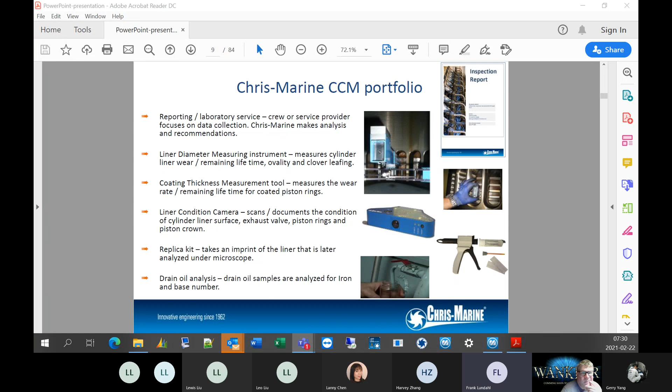We try to do this on a monthly basis, just to have a very good view of how the engine is feeling, so to speak. So the first year, we recommend you do it once a month or even tighter, just to make sure the lubrication and everything is as it should be. After that year, maybe once every 3 or 4 months, depending on how the results from previous measurements have been.

The consequence if you have problems you don't know about is that you'll have to change liners, hone them in place. Worst case scenario, I have to fly liners all over the world. In this case, I was on this job with David, it was a brand new engine, only 400 hours old, and we had to hone 2 of the liners. I think one of them was so bad that it was almost worn out already after 400 hours. So that's why it's so important to have a good view of your liner condition.

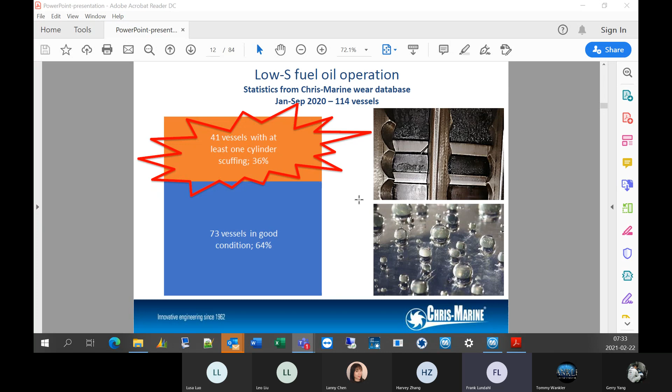We have seen that when we hone a liner, we get a very rough surface. This is basically just to have a good starting surface for the piston ring's life. After that, if the liner is wearing normally, you will have these very nice open graphite pockets, which basically is an oil reservoir for the liner. So the oil actually can stick to the liner.

If those pockets get clogged or something else happens, you will get scuffing, and that is basically micro welding between the piston rings and the liner wall, which of course is a bad thing.

This is a typical picture of scuffing. All the graphite pockets are smeared together or in some other way clogged up. We have no oil reservoir, the micro welding takes place, and you will get cracks in that surface. When those cracks start to open up, you will get a very high rate of wear in the liner, which basically in the end means that you have to change the liner at a very high cost.

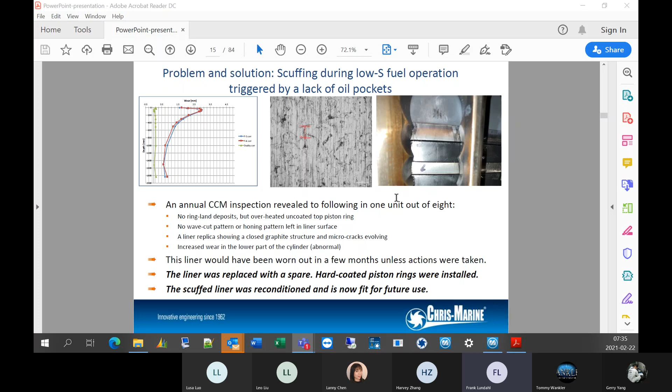If you do not take action when you see that you have bore polish, your liner could wear out in less than one year. Basically, that is what we saw in the picture where we did the honing. If we do this CCM, we can detect problems early on and take actions, and the liner can outlast the vessel.

We have some different problems. If you have a high sulfur fuel operation, you can get something called cold corrosion, which is a bad thing. You get an abnormal high wear in the liner, which basically destroys the liner.

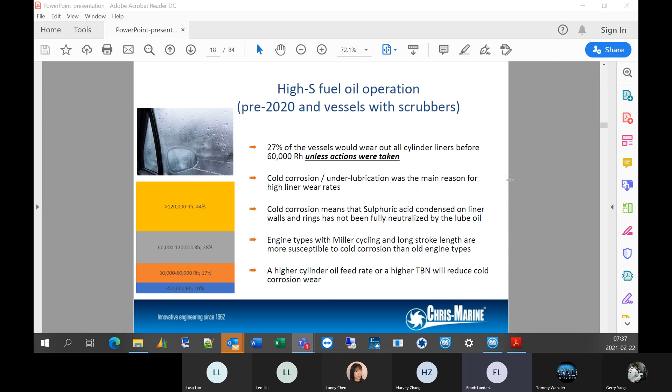The same thing applies if you have a low sulfur fuel, you can get the scuffing problem. So basically, it's a very narrow road you have to walk if you're going to have the liners last for a very, very long time. If you lubricate too much, they will wear out, and if you lubricate too little, they will wear out as well. So it's a very narrow path.

We use CCM to check for cold corrosion, and we use CCM to check for everything else. We have this graph here where we can actually predict when the liners are going to wear out. If we don't do anything from the beginning, we just carry on, and we can figure out that following this graph, the liner is going to wear out after 10,000 hours. But if we see the problems with the CCM program, we can take actions, more lubricating oil or less lubricating oil, and then we can change this curve so we can actually outlast the vessel.

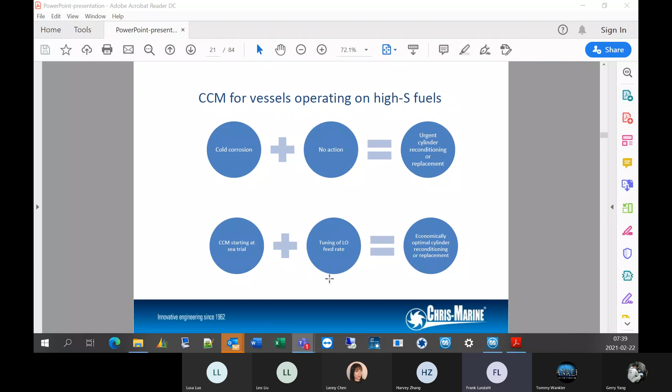How liners wear is a little bit difficult to say exactly, but one common denominator they have is that they always wear mostly at the top. So naturally, you will get a kind of trumpet shape of the liner. On top of that, you will also get, or could get, a clover leafing shape. That means the piston rings do not seal properly against the liner wall, and you will get blow-by and lose power, and worst case scenario, you destroy the piston rings and they collapse and you will get a scavenge compartment fire.

The only way to measure these clover patterns is with the LDM, because if you measure this with a stick, you will not get exactly how the liner looks. It's very difficult to detect if you don't have an LDM.

When do we do this cylinder reconditioning? That is what we call honing. That is where you have a lack of oil pockets, and that is basically the scuffing scenario.

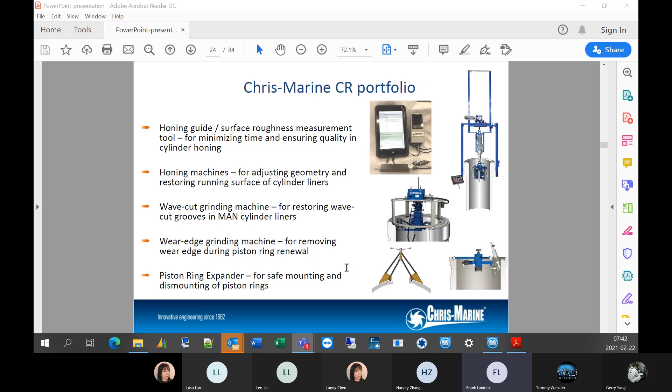This is the portfolio we have for fixing a liner. We have a honing machine, a grinding machine, and a little bit of that. But you already know this information, of course.

Summary, CCM and CR now. Several engines switched to low sulfur fuel back in 2020, and they haven't kept up the changes of the lubricating oil. So many boats have problems today without even knowing it, and that is something that could affect the boat later, because if everybody discovers they have a problem at the same time, you get a liner shortage, and worst case scenario, the boat has to go off hire.

Urgent maintenance is much more costly than planned maintenance, because if you plan it, you can stop the boat when you want and do the maintenance there, instead of emergency maintenance in a port where you have to fly the liners in or fly the tools in.

I don't know where we are in the... Okay, we can start with the drain oil sampling analysis.

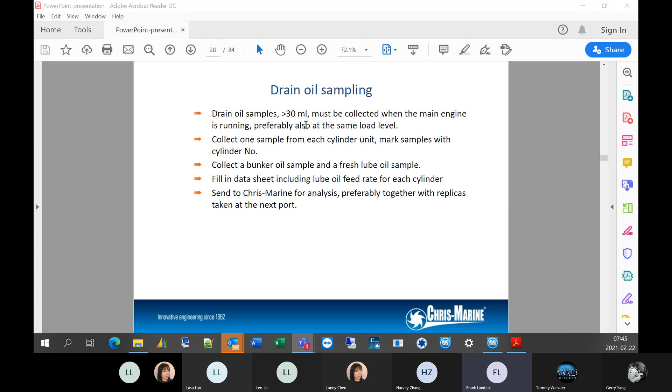It's slightly misleading, because if you have a very high ferritic wear and you increase the lubricating oil, it will seem like you have lower wear, because the ferrite will show less. But in real life, you have just diluted it a little bit, so you have more oil with less iron in it, but the wear could be exactly the same.

This is basically the same as before. We have the replica analysis. I think this is by far the most visual thing we have to look at the liner wall, because you see very, very high detail in the surface.

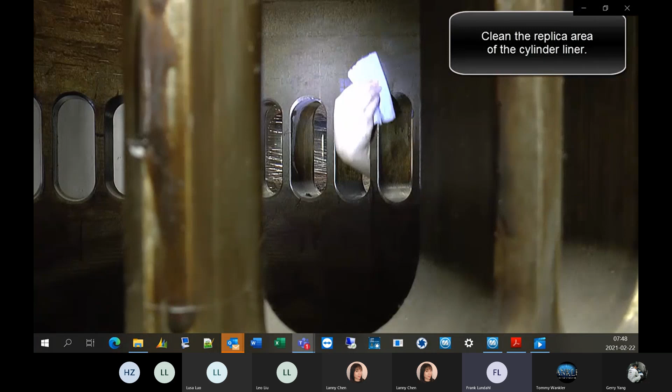Then we just let it roll. This is basically how you're supposed to take a sample from the replica. Clean everything up, make sure the extruder gun works as it should, and extract the compound onto the backing plate.

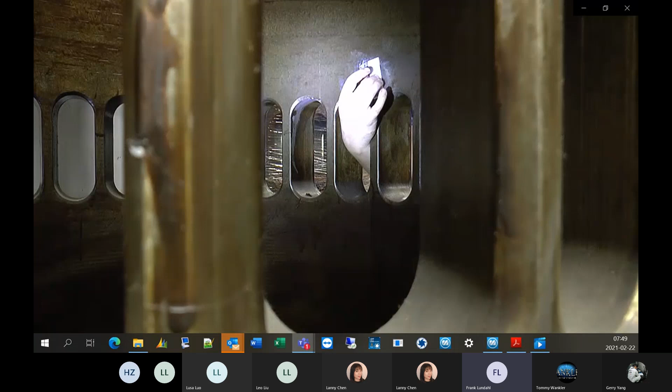And apply it to the wall, and you keep it there for 1 to 2 minutes. This is true for the F1 compound. If you have another compound, the time may vary.

You protect the sample with a piece of paper or something, and you mark it clearly so you know what liner you took it with. Put it in a bag, and you're done.

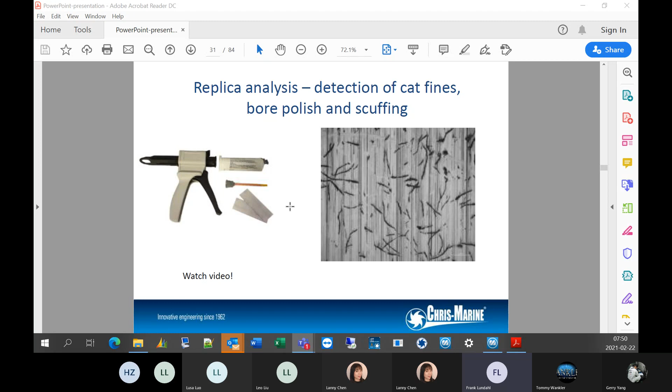At this point, you will send the sample to us, and this is what we can find out from the sample analysis. We can find cat fines, that is very small, extremely hard particles, that is from the fuel oil. The cat fines is added to the fuel oil when you refine it to get more oil out of the crude oil. I think it's called separators or purifiers. The purifiers on board a boat are designed to remove cat fines from the fuel. Depending on the state of the purifiers, they are more or less successful of doing that.

If you have a poor filtering system and very bad purifiers, the cat fines will enter the liner through the fuel oil and embed themselves in the cylinder wall. And those are extremely hard, so they will wear down the piston rings extremely fast. You can destroy a set of piston rings in 24 hours if you are very unlucky.

We can see scuffing, and that is a result of an early bore polish, micro weldings between the piston rings and the liner wall. We can see if everything looks as it should, if it's normal, or if we have a bore polish situation. And this shows very clearly under a microscope.

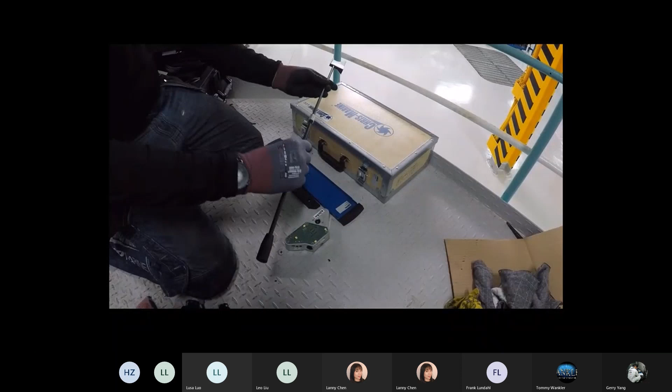First thing you do is adjust the plate so it fits the liner, and I urge you to read the manual. We have had some incidents where the camera plate actually got stuck inside the liner. So if you're gonna measure a 500 millimeter liner, you do the plate at 490, that is 10 millimeters smaller than the nominal diameter.

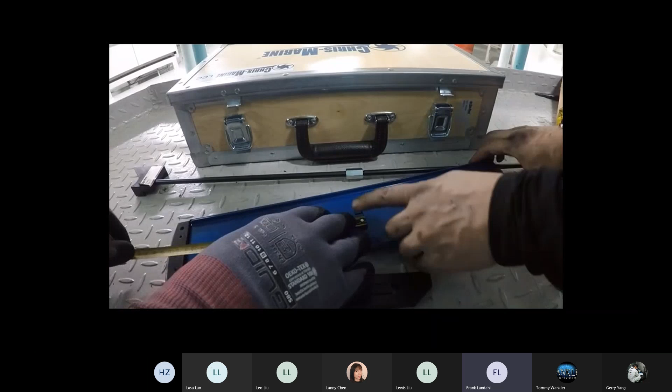Because if you get everything up to the parts where the combustion happens, just above the piston rings, you can have carbon deposits and everything, and this plate can get stuck. So it's very important that you make it 10 millimeters smaller than the nominal diameter.

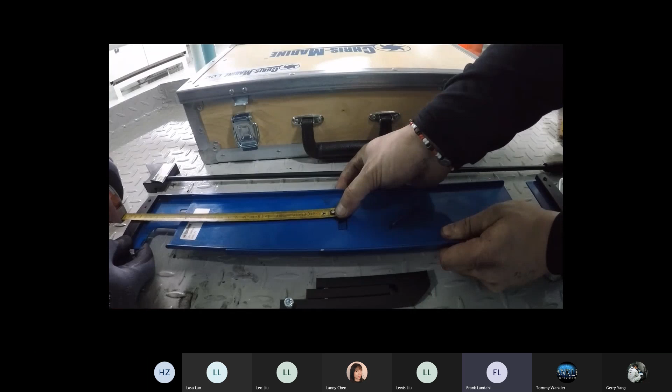And you adjust one side at a time, so you get like a radius from the beginning. If you look closely there, it's a 600 liner, and the plate is 590 millimeters.

Insert the plate. First thing you do is put in a height gauge. This is just because you don't want to squish the camera, and it's basically just a tell if you have enough space in the top. I have never seen that one being bent over by the exhaust valves, but I'm sure it will happen sometime.

This means if this one is not bent over, the clearance is sufficient. If it's bent over, you cannot turn the engine all the way around.

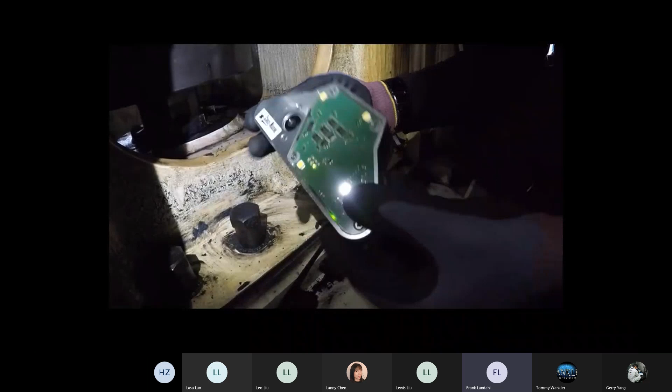This is preparation for inserting the camera. You polish the lenses if you have oil or so on them. Reach the height. I think the nominal time for this one is 60 seconds before the camera starts to take pictures, so you have a minute to insert the camera.

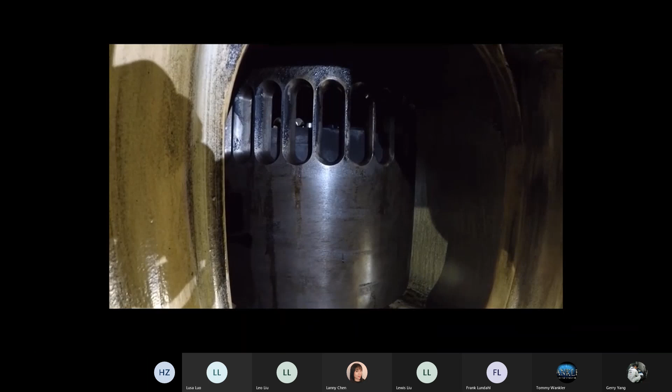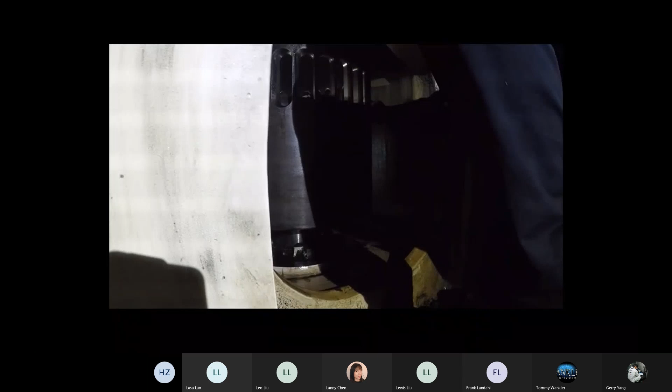And you get 3 quick flashes, and then a very bright one, and the turning of the engine can start. In this case, you do 4 revolutions, and you will get pictures from the entire liner. You remove the camera and you remove the plate. That's it.

What we can see from the pictures, those are taken with another camera outside, is the piston ring area. We are trying to get good photos with a tablet at the moment with the right lighting and something to hold it. But I think these ones are taken with a normal cell phone. We use everything we can just to get the best possible pictures.

But these ones are taken inside the liner with the camera, and you can actually see if you have black lacquering. And if you do something about this scenario and do the CCM again, you can see if you have solved the problem or not. That's why it's kind of important to do this on a regular basis.

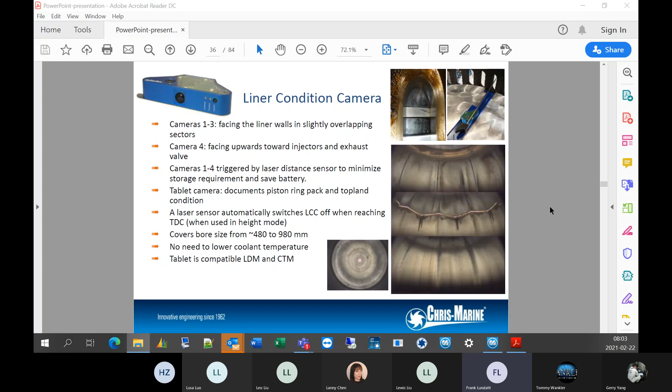It says here no need to lower coolant temperature, but the camera can actually overheat, and the hotter the camera gets, the poorer quality of the picture. So you don't want the liner to be over 70 degrees. Since you're doing this with the LDM, and the LDM demands a lower than 70 degree temperature in the liner, it's natural that you will get below 70, even if you only have the camera.

Let's say the current version... I don't know how old this text is, but the current version of the LCC, I think you can download everything at the same time, but the way we on the TSA team use it, we take all the pictures, leave them in the camera, and download it when we get home. We are currently trying to improve the software a little bit so it will be more user-friendly, but it has not been released yet.

The camera has to be charged for at least 3 hours. If you have a lot of liners, it could be that you need to recharge the camera in between the liners. You'll have 3 LEDs on top of the camera that shows you how much battery you have left.

And these are the parts: a tablet, a camera, a plate, and the distance template, a couple of cables, and an insert and takeout tool.

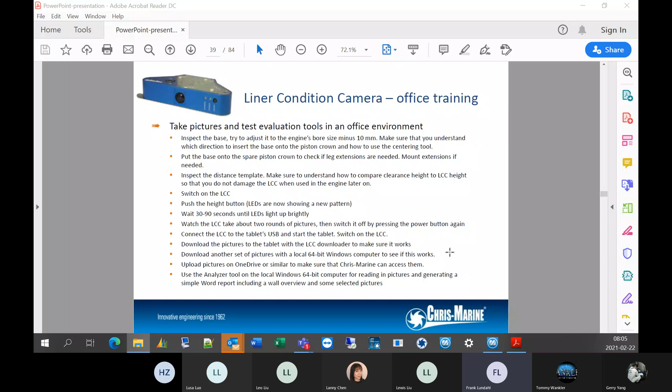Next tool we are using is a CTM, which is a coating thickness measuring device. I measure the coatings on the piston rings. I will put up another video of this.

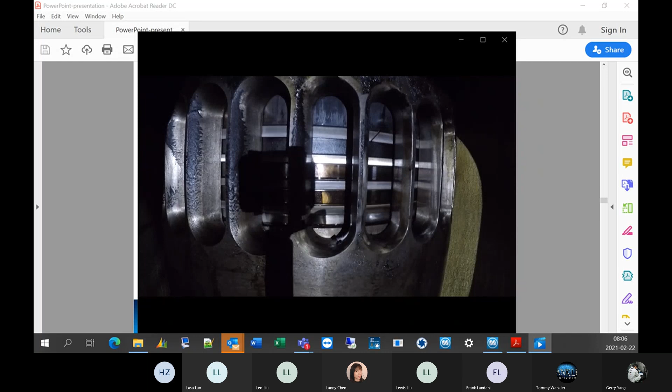This shows you where you want to have the piston. You put the piston in the correct position. Let's see here if I can get the next one.

You need to get the piston rings kind of clean, because if you have contaminations on it, the measurement will be slightly off.

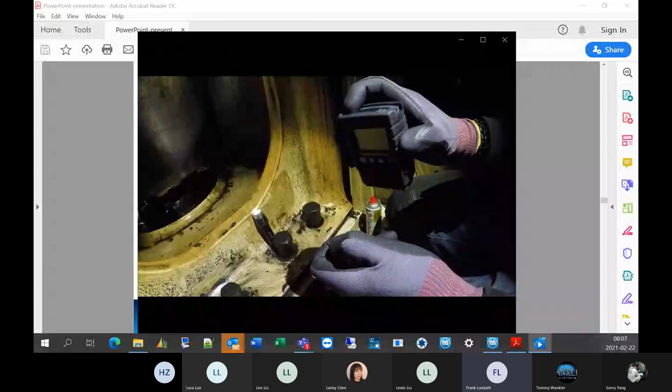You take off the protective cap. You turn it on. You will see a stripe line. And you just push it against the piston rings, and you will get a reading from that, and that is in microns.

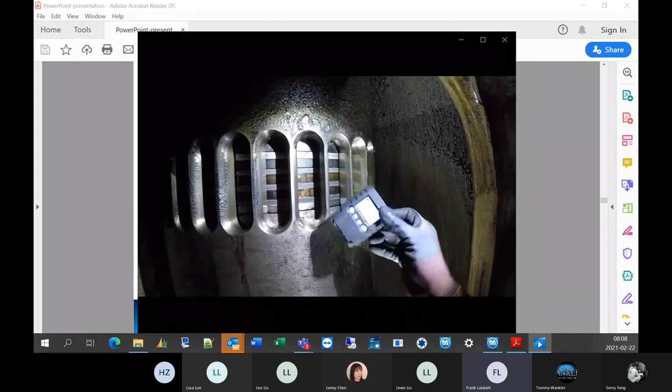You measure a couple of times on each piston ring, and you take an average. In this case, you have 7.2 microns of coating, which is not very much.

I think the coating is supposed to be somewhere between 400 and 600 from the beginning, but you have a little bit of variation because the process of making the coating cannot be controlled very accurately. So you have a small deviation, and it's important that you measure a couple of places and many times.

Different brands have different kinds and different numbers of piston rings. Like MAN normally has 4 piston rings, and Wärtsilä and BW has 3. So it's very important that you know which engine you're measuring, so you get all the rings.

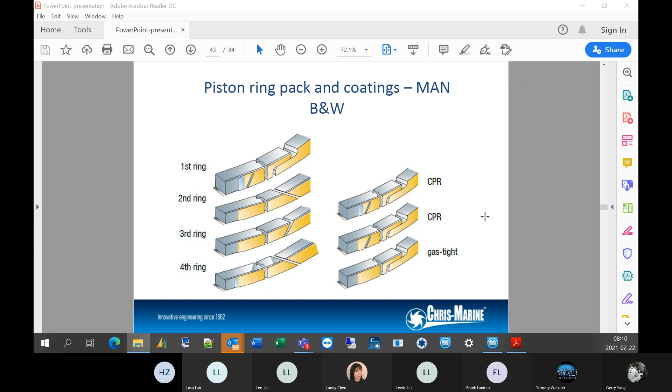There's a couple of types of piston rings. You have a gas lock for some of them, and some of them are just cut, and some have these grooves in it, and some don't, depending on where they are on the ring pack.

So we have the numbers for it. Normally the top ring has a coating of cermet. The coating is supposed to be, I said 400, here it says 550 to 600 microns. And a soft aluminium coating on that one for about 250 to 300 microns. So this is the number you expect to see if the liner is okay, or if the piston ring is new.

This cermet coating can last between 10 and 40,000 running hours. And the aluminium coating wears off within 500 to 3,000 hours, so that is basically just a running-in coating. All the bad things that happen in the liner, like bore polish, cat fines, or corrosive wear, will accelerate the coating wear rate, of course.

We have a scenario where if you have a hard chrome coated piston ring, it's also true that the coating thickness varies around the circumference due to the manufacturing process. So you will get a slight variation of everything, but it should stay around 400 to 600 microns.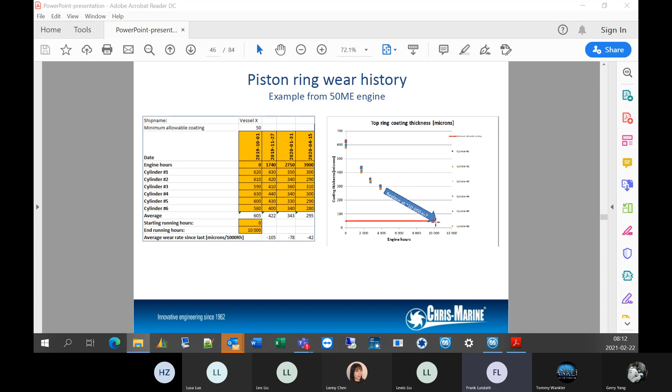What do we have more here? We have the LDM tool, which measures the diameter very accurately.

And like this, we can predict that the coating will wear out in 10,000 hours, for example. Here we can also see the trend surface if you have a very high wear trend. If you take this trend from the beginning and do nothing, you will have a maximum wear around here, and that is about 4,000 hours. But if you tinker with the lubricating oil or do something else, you can actually prolong the wear of the liner, so it doesn't wear out as fast.

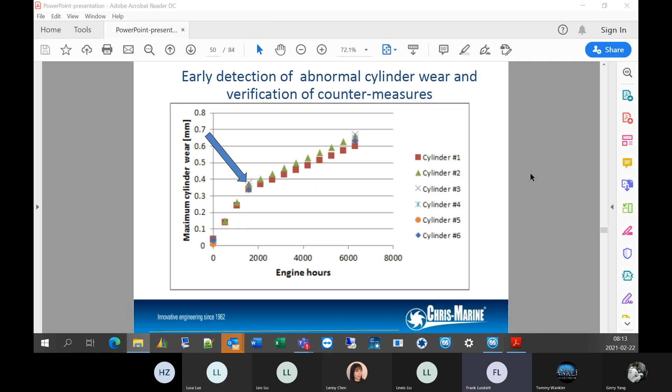The ovality could be triangular depending on how many injectors you have, or if you run on high sulfur fuel oil and everything. It's not really clear exactly how the ovality will appear, but normally if you have 3 injectors, you will get a triangular oval shape. If you have some funny business with lubricating oil, you can actually get almost like a star shape. That is a mirror of how many lube oil injectors you have on the liner.

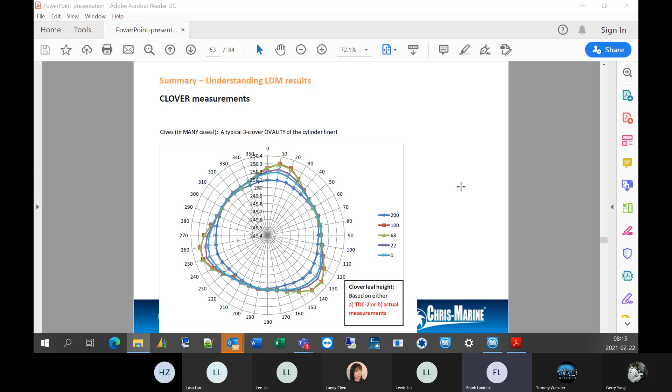This is an onboard version of the LDM. It's pre-calibrated from here, and they use it on only one engine, so they don't need all the tools around it.

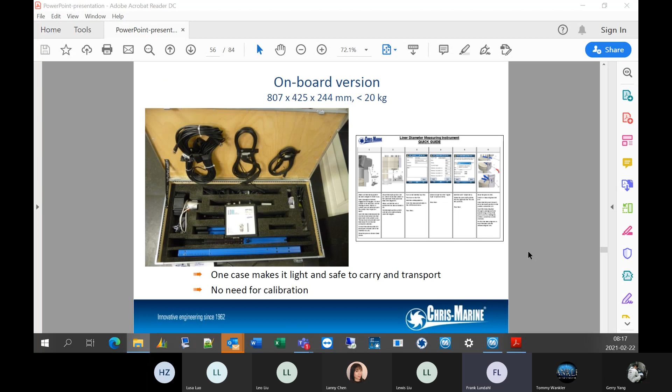And this is the tools you get: a height meter, the LDM, a tablet, an interface box, an inside micrometer, and a calibrator rig. It's not standard for everyone, but maybe I'm wrong here - they might get a calibrating rig for the onboard version as well. I'm not 100% sure of that, but also a bit of cables, insert and takeout tools, and a screwdriver.

The workshop version, you get all the extra legs and quite a bit more of things with it. I'm guessing you have the workshop version at your place, and it weighs about almost 30 kilos.

Some engines, we have figured out, need to get ground in the scavenge port because of the manufacturing process. So you will get kind of a teeth shape in the holes, and the LDM will not fit basically. You will have to have 35 millimeters, it should be here somewhere - well, I will figure it out for you. But we have a paper from MAN that says it's acceptable to grind those teeth down just to get the LDM in and out.

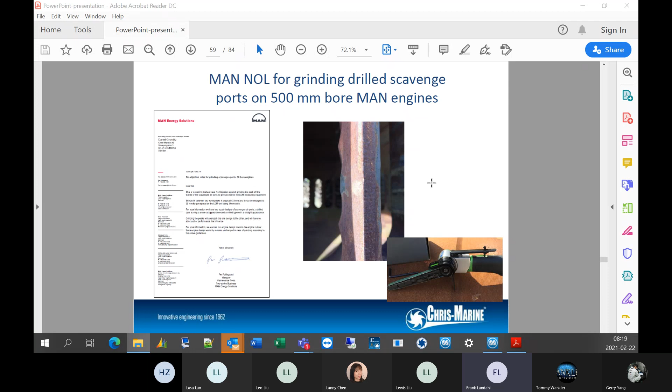But when you get out and measure an engine, you will need to check that the customer has made the right measurement, because at least half of the time the customer has made a mistake. So if you just buy their numbers straight off without double checking them, you might be destroying your instrument. So please double check that before you measure.

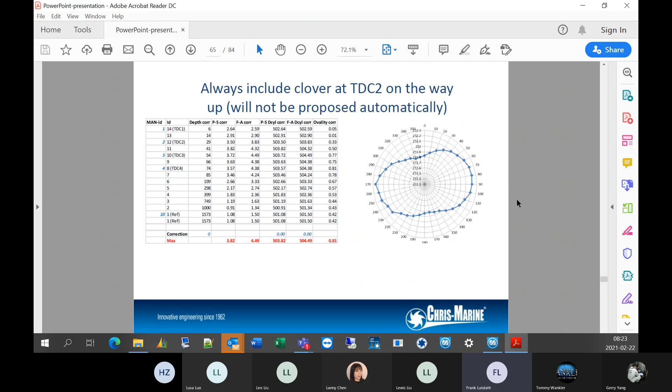What we do at TDC2, where the second piston ring turns at the top, is take this clover measurement. We always do that at TDC2, and you can do it on the way up while measuring, or complete the entire measuring sequence and then do the clover afterwards. It's up to you, as long as you remember it. This will take about 5 minutes.

All of these numbers you will extract either on the tablet or in your computer, using a post-processing tool that is fully automatic. You will include all your liners, and the Excel document will extract all the data, so you will get this picture automatically.

Do you have an LDM at your place so you can do some practical training?

Is anyone with me in China? Hello? Hello, hi, hello Patrick, okay. Yes, we have an LDM in the office now. Oh okay, yeah, that is good. So do you want us to operate it? Let's see, how much do I have left here?

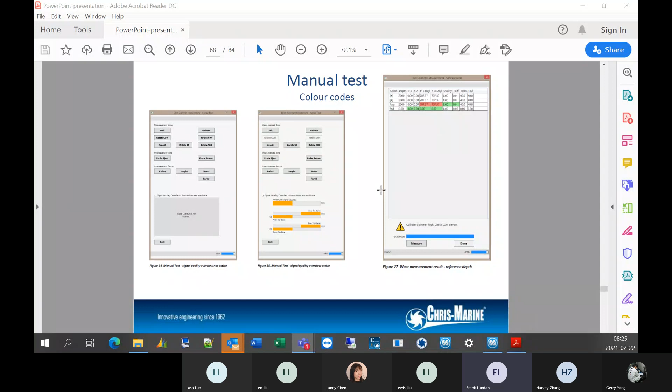In the tablets, okay, I can show you this later. This is also for later - this is more of a practical run. Poor signal quality, I will go through this later.

Summary. And I think I have a small video of this as well. If we don't have one, we'll have the coffee break now. I think we can use this one - it's called LDM step by step.

Normally this will be done by the crew - they will have this prepared when we arrive. What we need is the inspection hatch for the scavenge area removed, and we need a hole at the top to get inside the liner.

Indicator cock works like in this case - we have taken out the injector valve. Some want to take out the starting air valve. As long as you have, I think it's a 30mm hole, it's okay for the antenna.

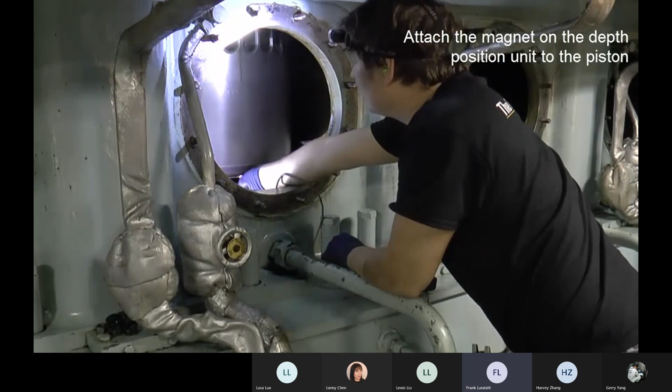We'll need to insert the depth position unit. You can connect the depth position unit and the antenna to the interface box.

Turn everything on. This is a really old version where they have the PDA computer.

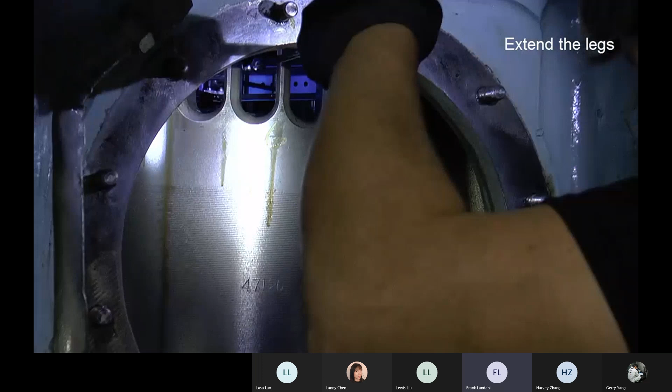Some engines are easier than others. I've been on a job where we actually had to modify the insert tools just to get into the liner. It took a while to do that.

So the base first and then the arm, and the arm is to get on the liner. Or the piston, sorry about that.

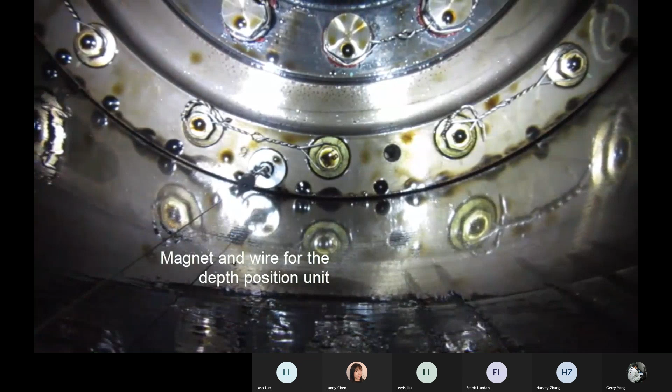You will get a visual green light on the interface box when it's okay. If you just follow the numbers on the tablet, you will most of the time miss your spot because there's a kind of data lag between the interface box and the PDA or tablet. So when you think you're in the right place on the tablet, you have gone too far.

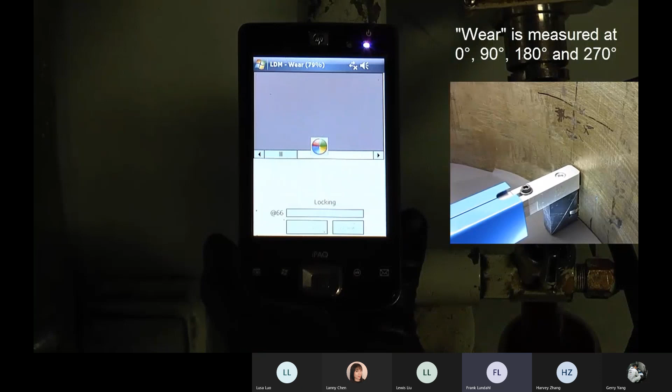The measurement is taken at 0, 90, 180 and 270 degrees to get port, starboard and fore-aft.

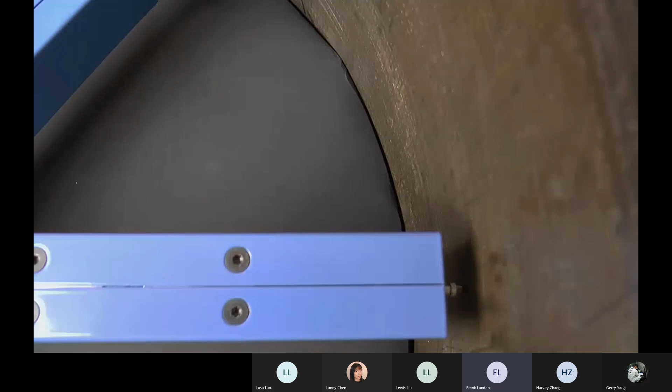And on TDC2, you take the infamous clover measurement. That means we take a measurement every 10 degrees, which results in a 360 degree view of the liner.

When everything is done, you remove it. Basically go on to the next liner.

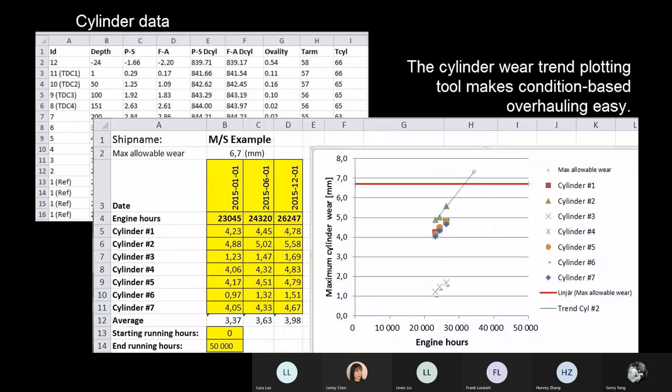You will get all the results in the post-processing tool. And that's it.

And I think this is the end of the theoretical part of this training.

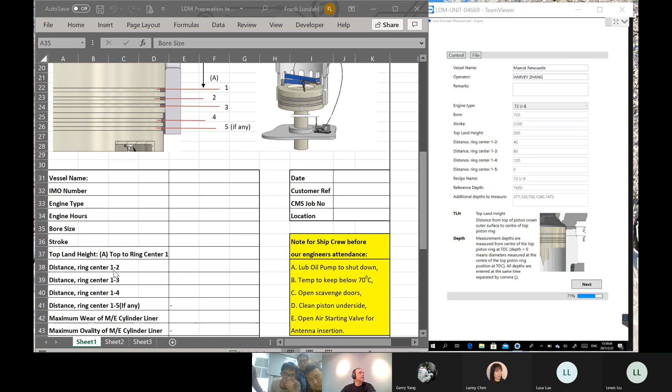So this is the preparation tool that the customer is supposed to fill in. And they will fill in vessel name right here, the IMO number, engine type, engine hours, and so forth.

The most important is the bore size, stroke, the top land height, and distance between 1 to 2, 1 to 3, 1 to 4, 1 to 5, if any.

And the distance between 1 and 2, you put here. 1 to 3, 1 to 4. And that is so you can get the correct recipe.

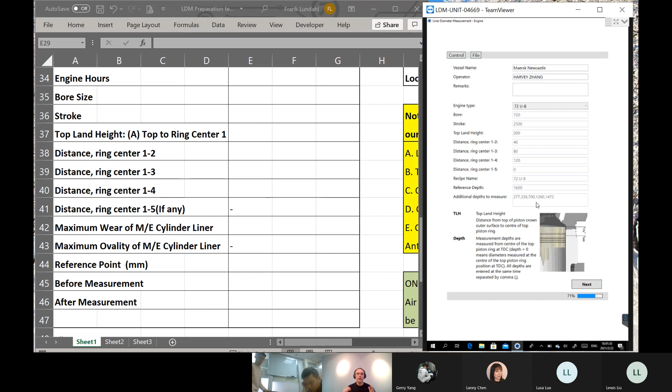So that is the first thing you do. This will be saved on the tablet. So if you measure the same boat again, you can just import that recipe, so you don't have to do this again. But then you have to remember what boat it was and if it's the same engine and everything.

How many of you guys are new? Have you all done this before, or is there anyone there who is brand new to the LDM? Oh well, just keep on going.

From this, do everyone see the screen? Let's see here. On your tablet, we have a couple of control devices. See if I can do this. I have a little bit of lag.

We start with the manual test. We can do that.

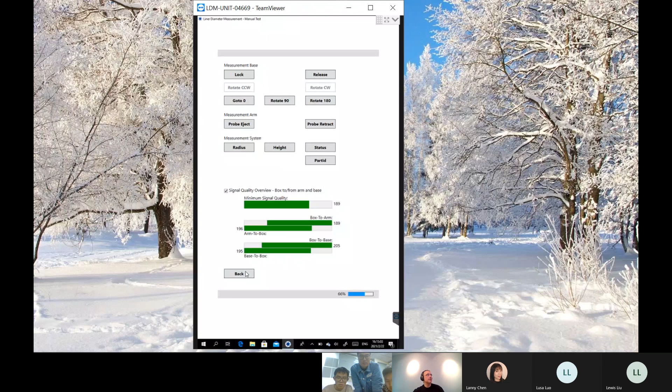You have the app setting page. This is nothing you normally tinker with.

This is the number of steps out for the probe and number of steps in. We use it when we factory calibrate the machine, but never ever after that. So this page is not very useful for you to know. It is there, but you will never use it.

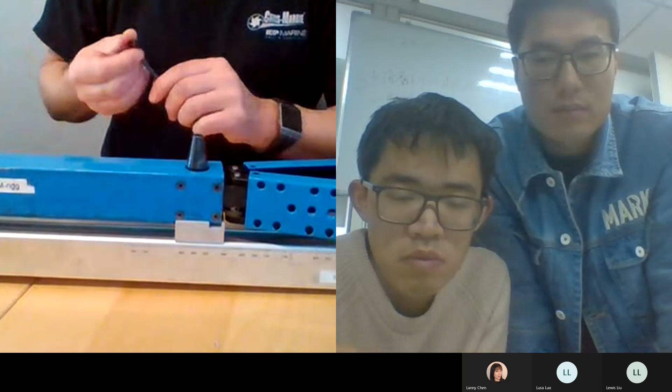And when you have done that, you remove the base again. Then you either take a fixed pin, like there are 500 millimeter fixed pins you can use, or you can use a micrometer.

Exactly, yes. And you adjust the other end using the micrometer to adjust this so it becomes exactly 500 millimeters, for example.

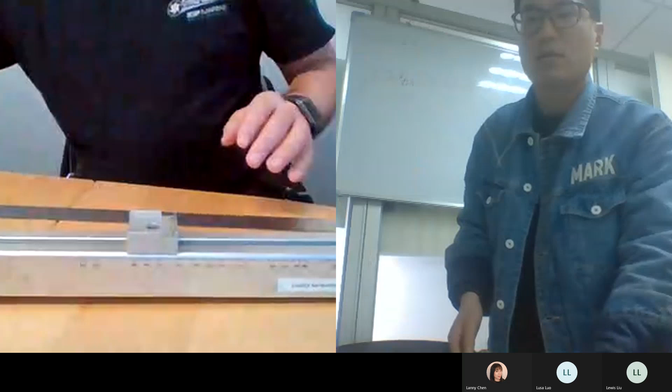Okay, so what you do is you take your base, put it in like this. You take your ruler and you try to get as close to 250 millimeters as possible. So please do that.

You will see in the bottom which diameter. OK, 你先让他看一下，你再收紧嘛。对。OK。

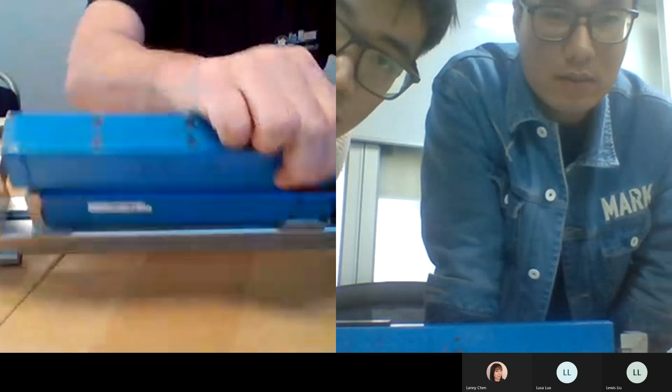Right here you have some helps. So if you push those out, you can use this one a little bit. You have to use a key. If you push that one out, it will look something like this. So you get a little bit of help, right?

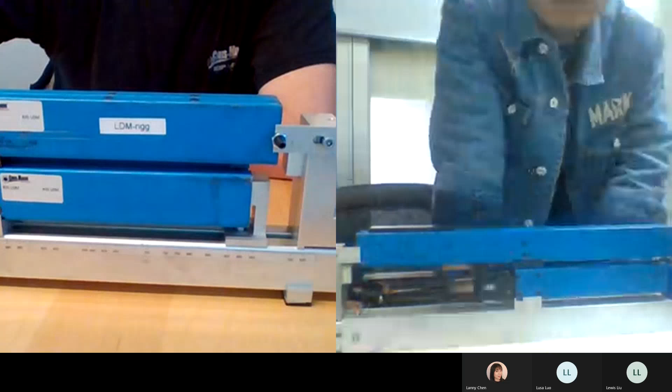So that end is the back side. 这边不要调，他现在调的是哪一块啊？ This one is down. Oh, sorry about that. This end points down. The probe is, it's like that. 对，the probe就是缩进去的，出来，是对，it's现在缩like that。进去。Yes. Because I can see you have it backwards because that is the back side on yours.

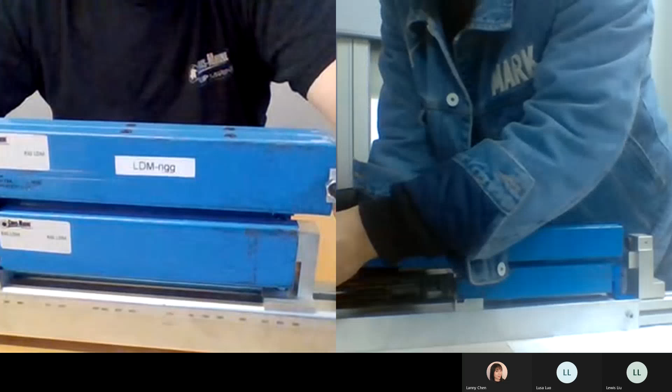Wrong side, wrong side. 我觉得这个有好几个呀，我们这个qualification有好几个呀，你这个要换一个。The other end of the LDM, please. The same effect. You have it on the wrong side of the LDM. This one supposed to be where the needle is.

这两个它本身就设计好的，就不能换来换去的，反正就设计好的一头是那个。挡不住，你是不是测量刚刚量的时候有点问题啊？它本身就是挡不住的，500尺寸的时候就是会这样。要挡不住就不对了呀。你重新再量一下，这个尺寸还是不是500了？对啊。这只有一个方法，就是把这个往这边靠，这边靠不动了，这是对里面了。但是如果现在是500就算了，不管挡不挡得动，500调了你下面没法调了，要是500就对了，就不管了。Stop. 总共是500对的吧？No.

If you touch those screws, you have to do everything all over again with a micrometer. So now, take off the head on the arm. Take this one off. And take the micrometer and check everything again. Because you are not allowed to touch those afterwards.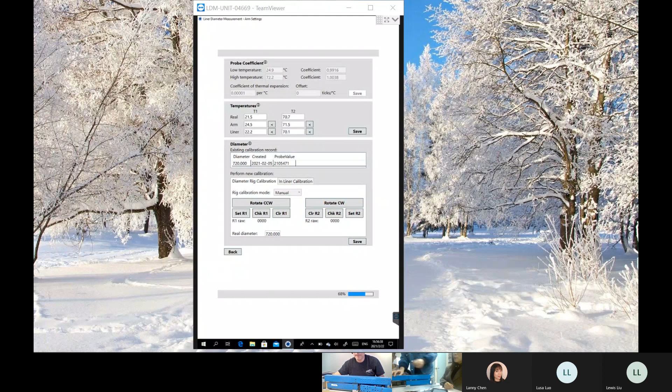No, that is counterclockwise, I showed you before, not clockwise. Stop, 反方向，逆时针不是顺时针。你先把它松开，对，逆时针，好吧，这样就应该对了吧？

一头是松开的，两头都横过来，一头是竖的，一头是横着的，你不能两头都横着。一头松开，对。Okay, then we try again, let's do this exactly as I do it.

Okay, take these ones off. 这个拿掉，他说不，他的是右手边的吧？他刚才拿掉的位置跟你一模一样，现在跟你一模一样了，不是反方向了，对，就跟你一模一样了。

Yeah, you turn it around. Turn the arm around. Clockwise, yes, all the way around. Clockwise or counterclockwise, doesn't matter, but take both of these off.

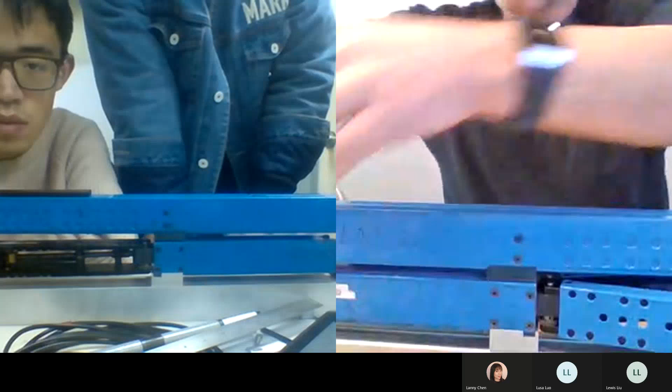Yeah, okay, now the probe is here. Yes, probe here, you take one. 拿probe的地方锁住，然后拿一个这边锁住，这边锁住probe那边锁住。这边锁不住的，刚刚应该这样有个斜，这边有那个错误，就是刚才那个。

我试一下看看，那边能锁住吗？右边能锁住，左边锁不住。不，他现在应该是跟我们一模一样的位置吧？

That is it, now you push the button clockwise. 顺时针，这里，实际上这样应该不行，因为这样会把指针别住，关键是我们这个设备从一开始就这一边是那个状态。

So does it hit the stop or not? No, it's balanced, you can see it's balanced. The problem is it's not locked here.

Okay, press clockwise, rotate CW on the tablet. No, but if we take the clockwise, the probe will hit here, will be blocked here. Yes, it's supposed to hit like that.